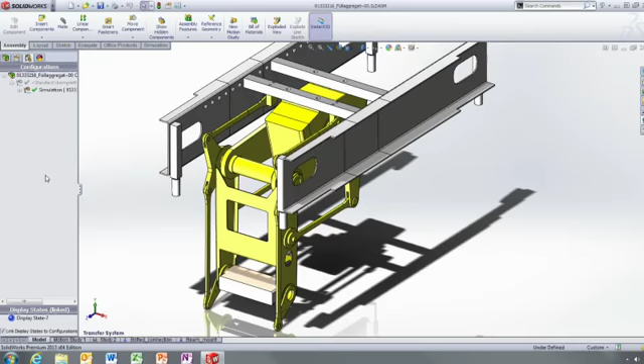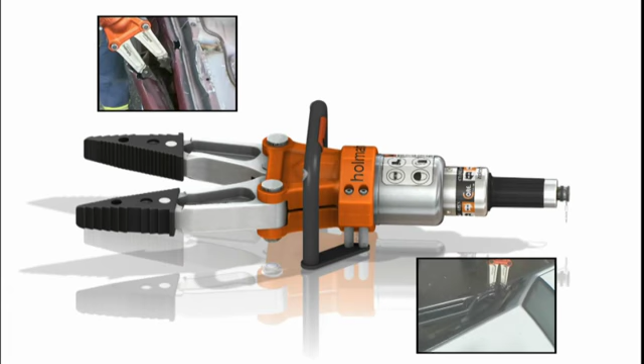Solidworks simulation gives designers access to powerful analysis capabilities, enabling them to improve their product performance, quality, and reliability. It isn't just about making sure your product is strong enough. It's about understanding how your product will behave in the real world during the design phase, so you can catch and correct problems early on, saving you time and money.

Let's look at a product you're all familiar with, a bicycle. A bicycle has to be strong and durable, as it can be subjected to extreme loads and abuse during its lifetime. The design of a bicycle has to balance weight, strength, and endurance to deliver a lightweight design with a long service life. With its easy-to-use, powerful capabilities, Solidworks simulation is the ideal tool to improve the service life of a bicycle using a stress and fatigue analysis.

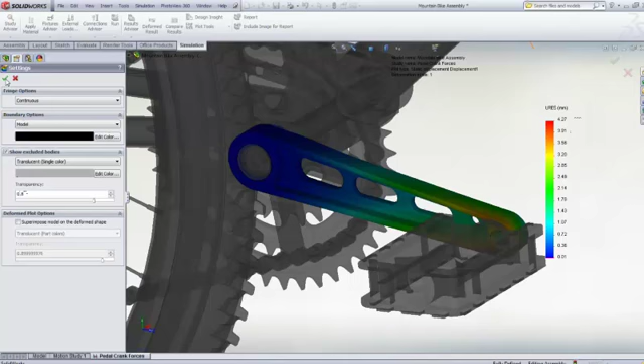Let's concentrate on the pedal crank. Solidworks simulation makes it easy to apply the pedal loads and restraints, and the resultant stresses and displacements are quickly calculated. With a maximum pedal displacement of 4 millimeters, the rider would feel that the pedal is too flexible, and we can see that the material of the pedal crank has yielded, showing that the design is also not strong enough. With Solidworks, this design problem is easily solved, and the crank is quickly redesigned and the analysis recalculated.

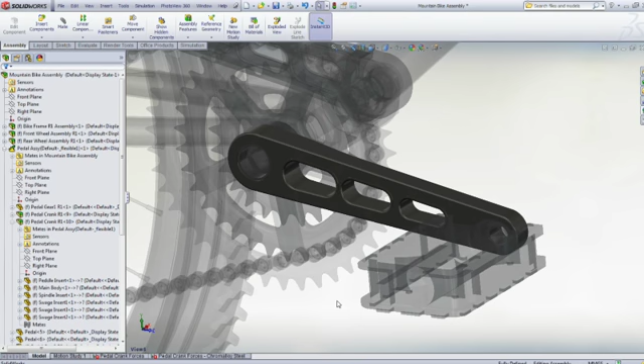It's now both stiff and strong enough, but what about its service life? Is there a chance that the pedal crank will fatigue? And if so, how many pedal revolutions before failure? The answer to this complex problem is easy with Solidworks simulation, and a fatigue study is quickly set up, and a varying load is applied to the crank.

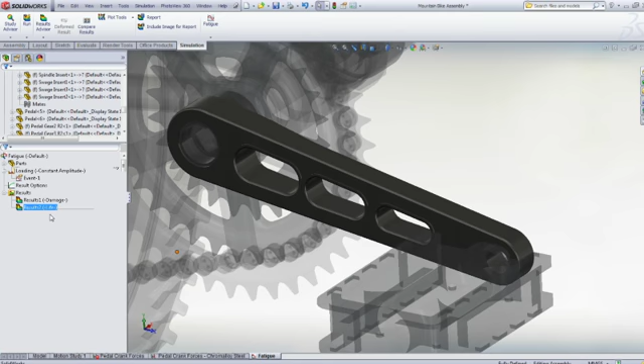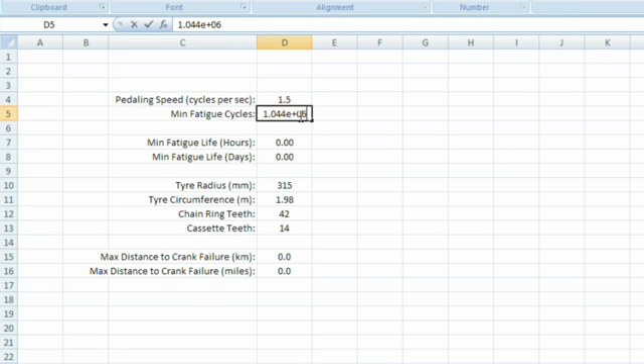Once the analysis is solved, we can see the crank lifetime, or number of cycles to failure, is just over 1 million cycles, or pedal revolutions. From this result, the crank's service life in terms of hours or miles of cycling can easily be calculated. In a few short minutes, using Solidworks simulation, we have improved our design and validated that it's both strong enough and durable enough to meet your customers' expectations.

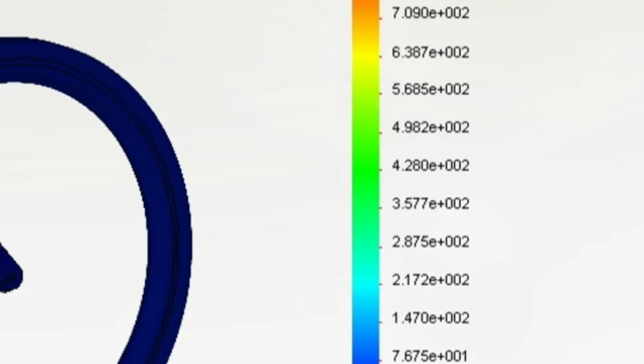Solidworks simulation gives every designer the tools to evaluate how their designs will work in the real world, giving performance feedback early in the design process, allowing you to make critical design decisions with confidence.